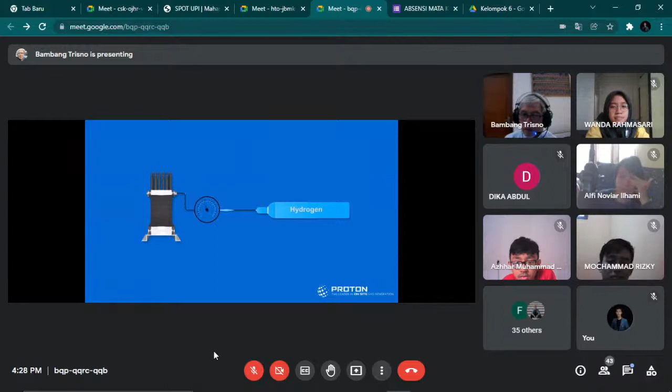PEM electrolyzers have a wide dynamic operating range and couple with renewable resources such as wind, solar, and hydro to store energy in the form of hydrogen for future use. With fast dynamic response times, high pressure, and favorable efficiencies, this sustainable technology is the backbone of energy storage solutions and improves grid stability, renewable intermittency issues, greenhouse gas and pollution reduction targets, and handles projects of varied size with ease. The hydrogen generated by the electrolysis in energy storage solutions can be used for a diverse variety of purposes.

Methanization, for example, uses hydrogen to convert CO2 into methane. Hydrogen can improve this conversion from 55% to 99%, reducing GHG emissions while producing biomethane that can be fed into the natural gas grid or used in a multitude of other areas. Hydrogen can also be used for zero-emission fuel. Fuel cell vehicles rely on this hydrogen for transport from point A to point B, with water being the vehicle's only emission. Hydrogen fueling stations are key to developing a viable and efficient clean transport infrastructure on a global scale.

Alternatively, hydrogen can be used to produce methanol. However, when supplied to industrial applications, hydrogen can be used to support various processes, including ammonia production, refining, and hydrogenation. Additionally, hydrogen can upgrade fossil fuels. When hydrogen is blended with compressed natural gas, nitrous oxide, carbon dioxide, and carbon monoxide emissions are significantly reduced compared to traditional fuels.

Proton On-Site has 20-plus years of experience leveraging innovative PEM technology to support energy storage solutions across the globe. With over 2,500 units installed worldwide, Proton On-Site offers electrolyzers ranging in scale from kilowatt to megawatt capacity that generate 100% emission-free and carbon-free hydrogen to complement renewable resource reliance. Visit our website, www.protononsite.com, to learn more.

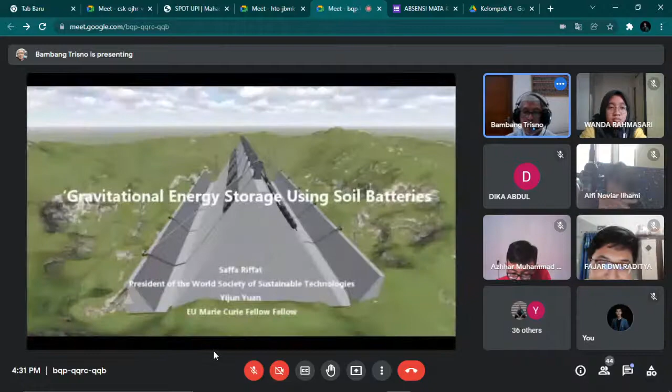Can you imagine our world in 2050? By mid-century there will likely be 9 billion people on the planet, consuming ever more resources and leading ever more technologically complex lives. The world's requirement for electric power is growing rapidly. And according to the International Energy Agency estimates, an additional 250 gigawatts of power will be required annually between now and 2050.

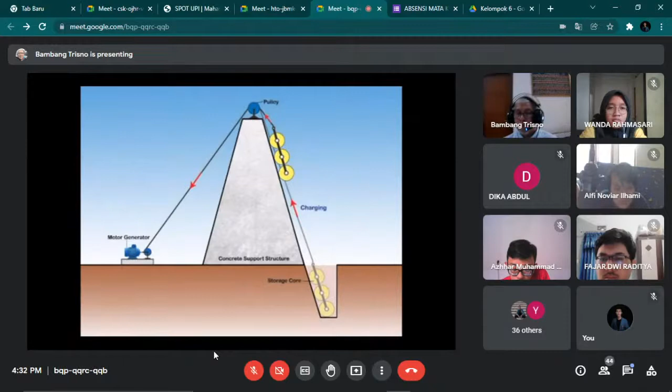Renewable energy technologies including wind, solar, wave and tidal can provide clean energy, but these technologies are intermittent, often producing power when grid utility or users don't require them. In recent years several gravity power technologies have been proposed. A new concept is proposed by University of Nottingham academics Professors Saffa Riffat and Yijun Yuan, who filed a patent application in May 2019, claiming a novel gravity energy storage technology based on drums filled with soil.

The technology uses storage cores that could be shifted between lower and higher points. Pulleys are mounted on the top of central concrete structure. The drums are fitted with axial shafts and bearings and are mounted on a metal frame similar to tarmac rollers. The drums could be then pulled on the sloped central concrete structure, using cables and motor generator. The motor generator is mounted on the ground to provide a good stability and ease of maintenance. When heavy drums move down, they release potential energy to the main grid system.

I've got my dangerous hammer out again, folks, which means yet another slightly lame attempt at demonstrating a physical concept in order to introduce a video. Don't knock it though, it's cheap and it's quick, and it was the heaviest thing I could find in my drawer of many things, so it'll have to do. You might remember I last used it when I looked at liquid air batteries a few months ago.

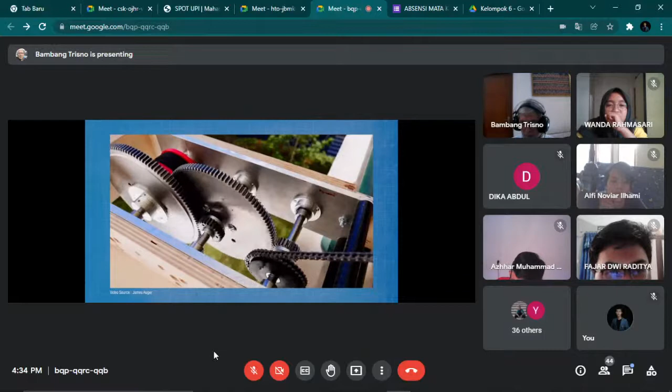And then I saw these young shavers from the Reconstrained Design Group in Madeira, led by an extremely talented British designer called James Auger. They had the distinct advantage of a 4th floor balcony and upped the ante a bit by using a 15-litre water cooler bottle and a smart-ass gearing system, which I hadn't thought of. Anyway, the result is that they were able to very slowly lower the water bottle to generate enough energy to run a turntable playing Folsom Prison Blues by Johnny Cash.

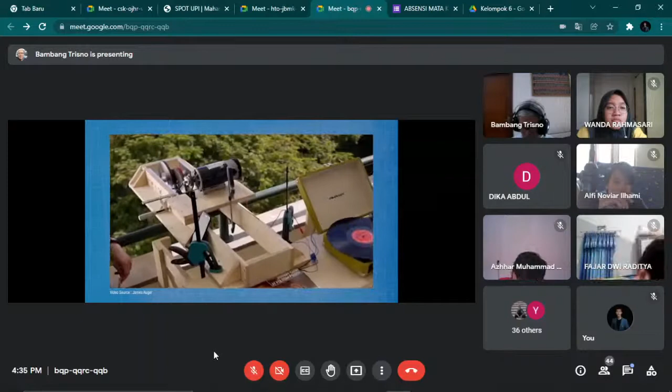I can't let you hear the music, not because I don't enjoy a bit of the old man in black, but because despite being dead, Johnny still insists that people pay him whenever they use his stuff. So I'll leave a link to this video in the description section, and you can listen to his unmistakable dulcet tones there instead.

The point is, the system works, and if you're clever, you can control it extremely precisely, either to deliver energy very quickly, like my design, or in a very controlled and gradual way, like their contraption. And that means if you could scale it up, you might find yourself with yet another solution to grid-scale energy storage. Simple, right?

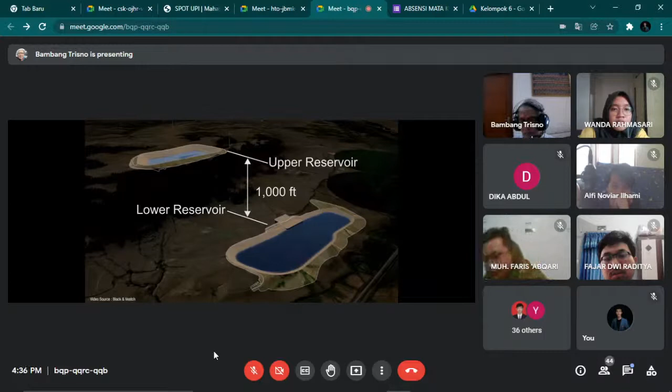Using gravity to provide electrical energy is of course nothing new. We've been doing it with pumped hydro since 1907, when this facility was first started up in Schaffhausen in Switzerland. But not many pumped hydro facilities are being built anymore, mainly because they take years to construct, cost about $1 billion, and quite rightly need all sorts of long-winded and difficult environmental permits. But there are a couple of companies now working on the same concept as James Auger and his mates, literally lowering extremely heavy weights off the top of tall buildings, but on a much, much larger scale.

This 150-metre tall tower system has been developed by a company called Energy Vault, led by co-founder and chief executive Robert Piconi. And it's really very clever indeed. Essentially, you've got 3 big cranes bolted to the top of a 35-storey steel structure surrounded by a stack of huge blocks arranged very precisely into a tight cylinder.

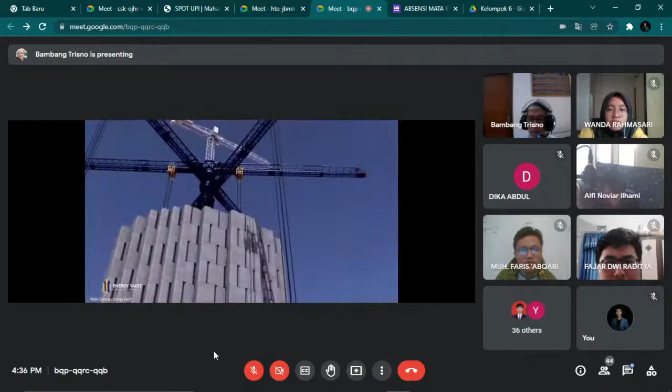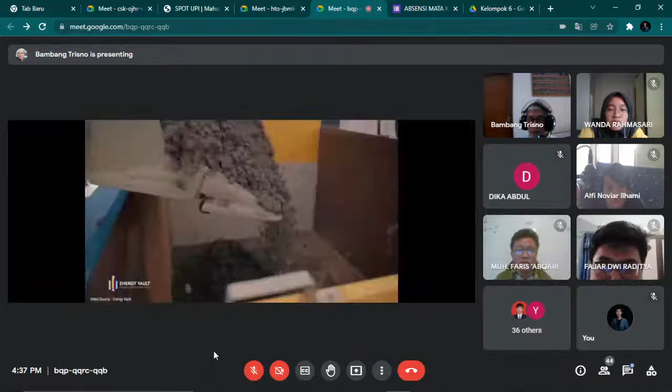They look like concrete, don't they? And if they had actually been cast from brand new concrete, that would have been a very bad idea indeed from an environmental point of view. But Energy Vault have partnered with Mexican materials company Cemex to develop a composite material made up of waste products. There is some concrete in the mix, but it all comes from demolition debris. And that's added to coal ash, industrial slag, and even some of the soil from local building sites, all of which would most likely otherwise have just been dumped in landfill.

There's 6,000 of these composite bricks in the structure, and each one weighs 35 tons. A system of pulleys and motors, all controlled by mind-bogglingly sophisticated software, can move several blocks at a time, shifting them from their predetermined positions in the tall, tight stack to another very precisely controlled position lower down, creating an outer cylinder. As the blocks are lowered, the pulleys cause a rotation that generates electricity. Then when the structure needs to be recharged, renewable energy from surrounding wind turbines powers the winches to pull the blocks back up into their original location.

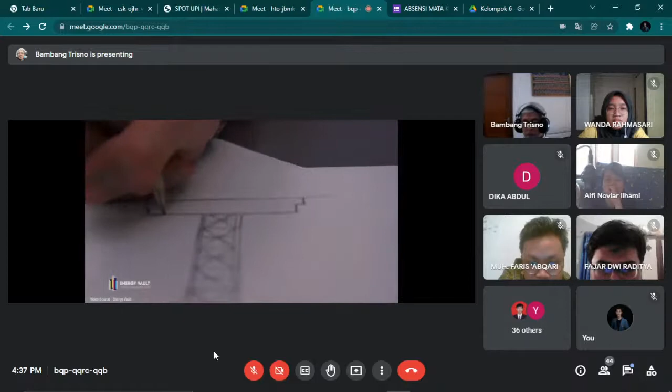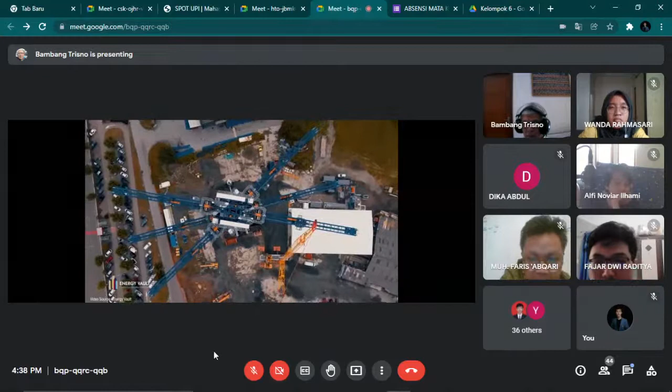The company developed their system in Switzerland and built their first full-scale commercial demonstration unit, or CDU, on the outskirts of a town called Arbedo-Castione in 2020. They claim a standard configuration can provide 35 megawatt hours of power to the grid. It's pretty quick too. Piconi reckons the system can go from 0 to 4 megawatts in just 2.9 seconds and provide instant response within milliseconds. And that means it rivals lithium-ion batteries as a frequency response grid balancer.

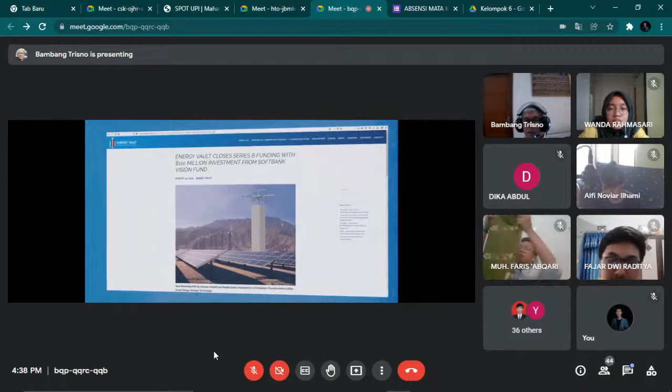But it can also be used as a black start service, which in other words means bringing a grid system back online in the event of a blackout. Or it can be run more slowly to provide up to 10 hours of continuous baseload discharge. Energy Vault are backed by some pretty hefty investment too, in the form of $110 million from SoftBank, a Japanese investment bank specialising in bringing sustainable technologies like this to market.

SoftBank already invest in large-scale renewable energy projects all over the world, so their partnership with Energy Vault should be a kind of symbiotic relationship, with the bank opening new doors for Energy Vault and Energy Vault's system facilitating even more competitive cost structures for SoftBank's investments. Piconi says they've got their levelized cost per megawatt hour down to somewhere between $30 and $40, which, if combined with renewable energy sources, can potentially undercut existing gas-fired power plants.

Hot on their heels, but not quite so far ahead on development, is this Edinburgh-based startup called Gravitricity, founded by a guy called Peter Fraenkel. Fraenkel is perhaps best known for inventing the world's first full-scale tidal energy turbine, which was bought by the German energy and manufacturing giant Siemens. Gravitricity are working on the same basic principles of physics as Energy Vault, but their unique selling point is that they intend to utilise disused mine shafts as underground void spaces into which they can lower their electricity generating weights.

You might think that's a bit of a serious limitation, but actually there's a surprising number of these shafts strewn all over the planet. A full-size version of their system will be able to move weights of between 500 and 5,000 tonnes up and down within the shaft, using multiple cables to distribute the loads evenly. They claim a 50-year design life with no cycle limit or degradation, something that represents a significant advantage over lithium-ion batteries. Just like Energy Vault, they reckon they can hit a 0 to full power response time of less than 1 second with a system efficiency of somewhere between 80 and 90%.

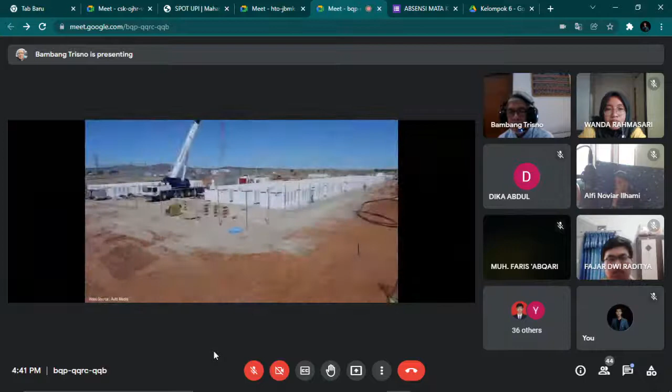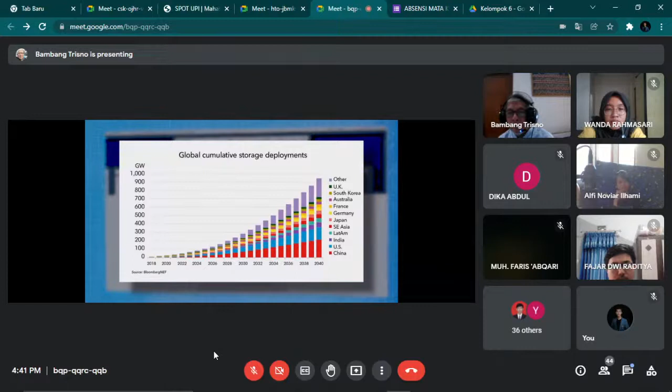Lithium-ion batteries currently dominate the grid-scale energy storage market, a sector that Bloomberg New Energy Finance projects to grow from 9 gigawatts in 2018 to more than 1 terawatt in 2040. But there's a growing number of alternatives, including these gravity systems, that are now challenging lithium-ion supremacy. We've already looked at liquid air batteries and redox flow batteries. Another option is zinc air, being developed by a Canadian firm called Zinc8, and then there's liquid metal batteries being developed by Ambri, both of which we'll take a closer look at in future programs.

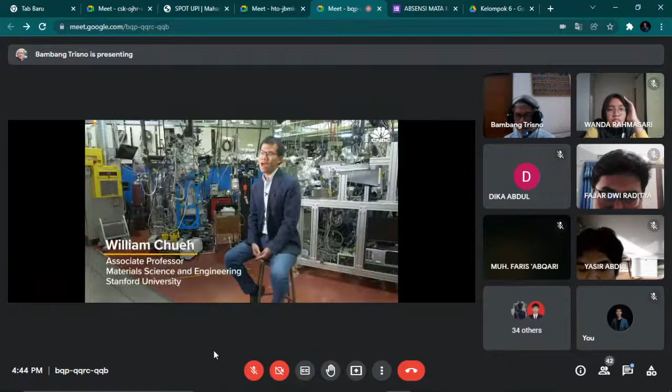You see them in products like Tesla's home battery, the Powerwall, and utility-scale system, the PowerPack. But though lithium-ion is dropping in price, experts say it will remain too expensive for most grid-scale applications. To get to battery for the electrical grid, we need to look at a further cost reduction of 10 to 20x. Right now, lithium-ion batteries just can't store more than 4 hours worth of energy at a price point that would make sense. Plus, they pose a fire risk, and their ability to hold a charge fades over time.

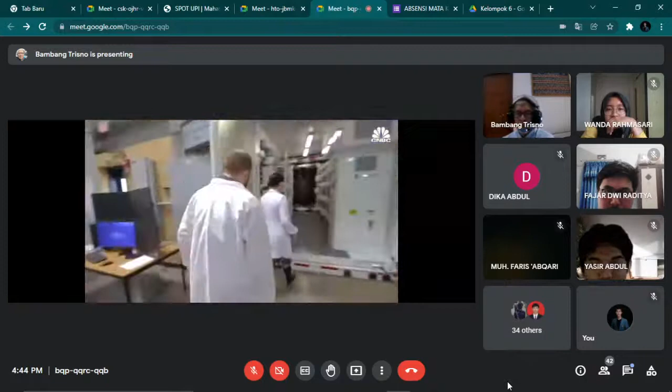To address this, there's a cadre of entrepreneurs experimenting with a variety of different solutions. Now we're seeing flow batteries, which are liquid batteries, and other forms of storage that are not chemical or battery-based. And each has serious potential. We looked at materials on the periodic table that were actually going to be cost competitive from day one. Primus Power's flow battery is a workhorse. Thermal energy storage has a pretty unique opportunity to be extremely low cost. Our solution will last 30 plus years without any degradation in that performance.

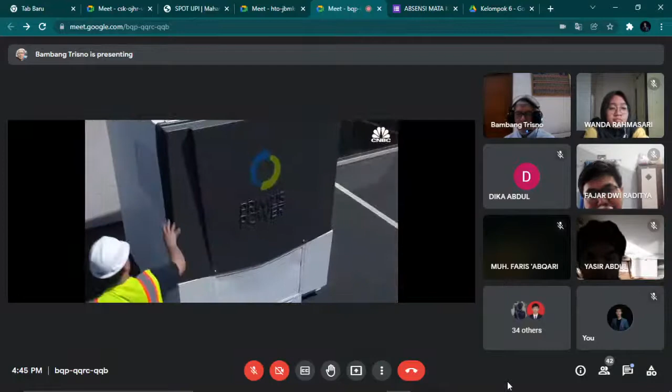Which technologies prevail remains to be seen, but one thing is clear: for renewables to truly compete with fossil fuels, we need to figure out a better way to store energy.

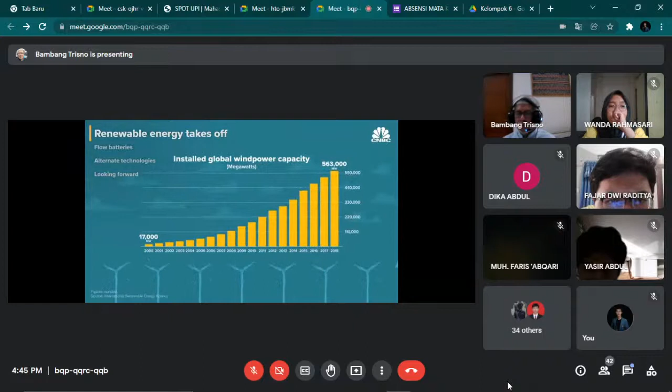From 2000 to 2018, installed wind power grew from 17,000 megawatts to over 563,000 megawatts, and solar power grew from a mere 1,250 megawatts to 485,000 megawatts. And it's not stopping there. Renewables are expected to grow an additional 50% over the next 5 years.

We know today that solar PV and wind are the least expensive way to generate electricity. In particular, the price of solar photovoltaics has plummeted far faster than all forecasts predicted, after China flooded the market with cheap panels in the late 2000s. All the Wall Street analysts did not believe that solar was going to ever stand on its own without subsidies.

Well, a few years later, even the most conservative analysts started realizing that actually solar was going to become economic in most parts of the world pretty quickly.

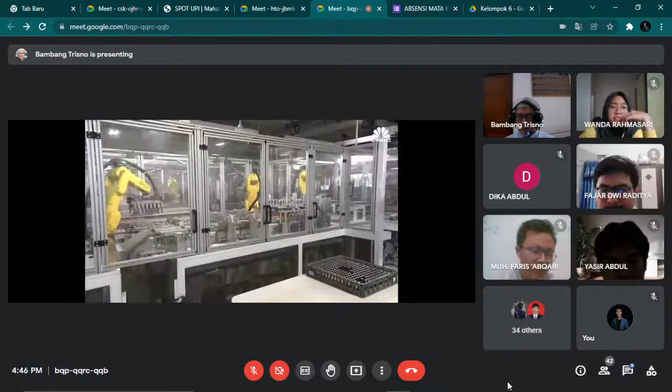And as solar's gotten cheaper, so too have lithium-ion batteries, the technology that powers electric vehicles, our cell phones, and laptops. Thanks to improved manufacturing techniques and economies of scale, costs have fallen 85% since 2010.

Now, wind or solar plus battery storage is oftentimes more economical than peaker plants, that is, power plants that only fire when demand is high.

Tesla, for example, built the world's largest lithium-ion battery in Australia, pairing it with a wind farm to deliver electricity during peak hours. But this doesn't mean lithium-ion is necessarily economical for other grid applications.

We don't really see the cost structure coming down to the point where it can serve those tens to hundreds of hours applications. Basically, the market is ripe for competition.

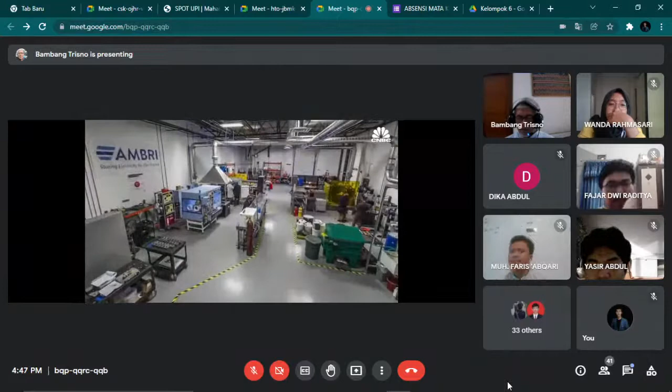There are dozens of chemistries being looked at today, and hundreds of companies working on scaling up and manufacturing new battery technology.

Lithium-ion has done remarkable things for technology, but let's go to something far better.

One of the main alternatives being explored is a flow battery. Unlike lithium-ion, flow batteries store liquid electrolyte in external tanks, meaning the energy from the electrolyte and the actual source of power generation are decoupled. With lithium-ion tech, the electrolyte is stored within the battery itself.

Electrolyte chemistries vary, but across the board, these aqueous systems don't pose a fire risk, and most don't face the same issues with capacity fade. Once they scale up their manufacturing, these companies say they'll be price competitive with lithium-ion.

Hayward, California-based Primus Power has been working in the space since 2009 and uses a zinc bromide chemistry. So far, it's raised over $100 million in funding, including a number of government grants from agencies like the Department of Energy and the California Energy Commission.

Primus's modular Energy Pod provides 25 kilowatts of power, enough to power 5 to 7 homes for 5 hours during times of peak energy demand, and for 12 to 15 hours during off-peak hours. Most systems use multiple energy pods, though, to further boost capacity.

The company says what sets it apart is its simplified system. So instead of 2 tanks, which every other flow battery has, Primus only has 1.

We are able to separate the electrochemical species by taking advantage of the density differences between the zinc bromine and the bromine itself and the more aqueous portion of that electrolyte.

To date, Primus has shipped 25 of its battery systems to customers across the US and Asia, including a San Diego military base, Microsoft, and a Chinese wind turbine manufacturer.

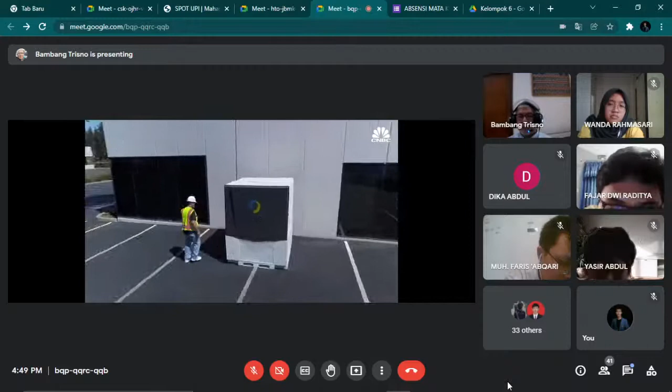It expects to ship an additional 500 systems over the next 2 years. Future customers are either independent power producers doing solar plus storage at the utility scale, or larger commercial enterprises.

Also operating in this space is ESS Inc., an Oregon-based manufacturer of iron flow batteries, founded in 2011. Its systems are larger than Primus Power's.

They're basically batteries in a shipping container, and they can provide anywhere from 100 kilowatts of power for 4 hours to 33 kilowatts for 12 hours, using an electrolyte made entirely of iron, salt, and water.

When we came into this market, we wanted to come into it with a technology that was going to be very environmentally friendly. It was going to be very low cost. It didn't require a lot of volume on the production line to drive down costs.

ESS is backed by some major players like SoftBank Energy, the Bill Gates-led investor fund Breakthrough Energy Ventures, and insurance company Munich Re. Having an insurance policy is a big deal, since it will make risk-averse utility companies much more likely to partner with it.

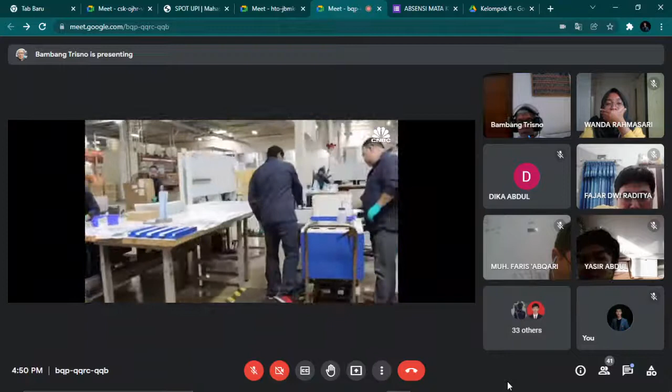So far, ESS has 6 of its systems, called Energy Warehouses, operating in the field, and plans to install 20 more this year. It's also in the process of developing its Energy Center, which is aimed at utility-scale applications in the 100 megawatt plus range.

That would be 1,000 times more power than a single energy warehouse.

We're planning to be at 250 megawatt hours of production capacity by the end of this year, which is probably a little over 10 times the capacity we had last year.

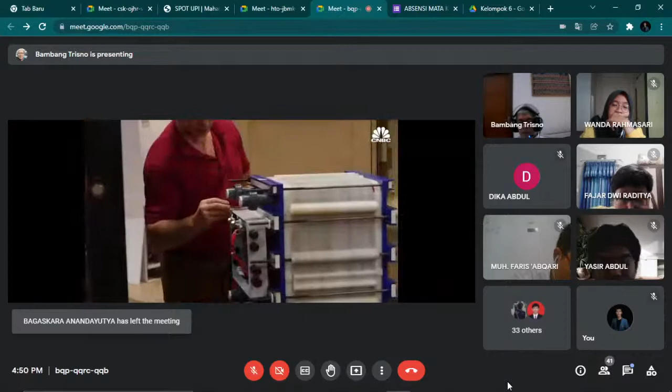And then eventually getting to a gigawatt hour of production capacity in the next couple years. So far, key customers include Pacto Energia, a private Brazilian energy supplier, and UC San Diego.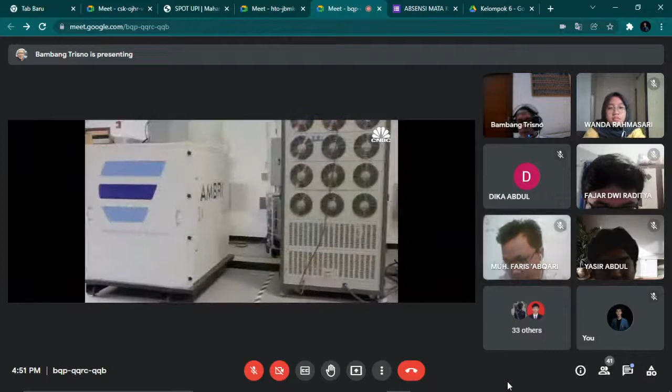But for all their potential, flow battery companies like Primus and ESS Inc. still aren't really designed to store energy for days or weeks on end. Many of those flow battery technologies still suffer from the same fundamental materials cost challenges that make them incapable of getting to tens or hundreds of hours of energy storage capacity. Other non-lithium-ion endeavors, such as the MIT spin-off Ambri, face the same problem with longer duration storage. Form Energy, a battery company with an undisclosed chemistry, is targeting the weeks or months-long storage market, but commercialization remains far off. So other companies are taking different approaches entirely.

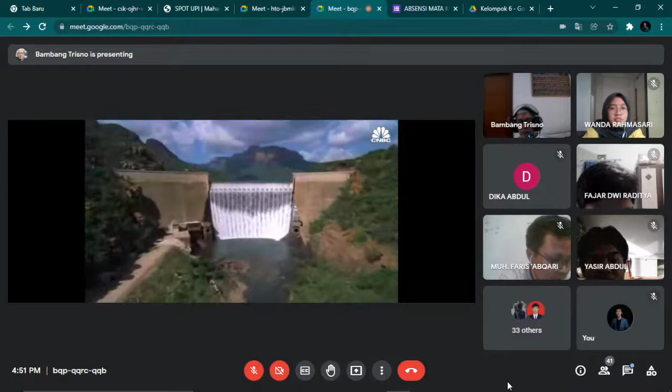Currently, about 96% of the world's energy storage comes from one technology: pumped hydro. This system is pretty straightforward. When there's excess energy on the grid, it's used to pump water uphill to a high elevation reservoir. Then, when there's energy demand, the water is released, driving a turbine as it flows into a reservoir below. But this requires a lot of land, disrupts the environment, and can only function in very specific geographies.

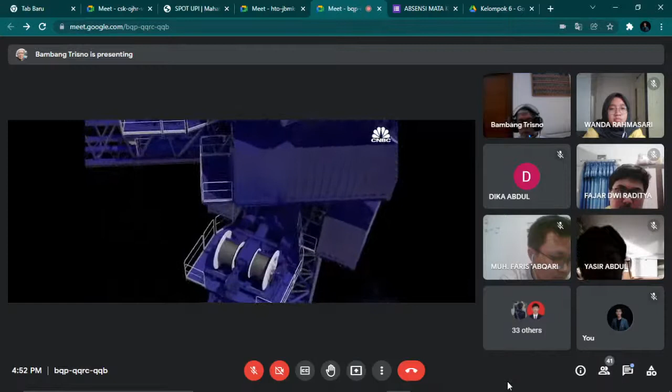Energy Vault, a gravity-based storage company founded in 2017, was inspired by the concept, but thinks it can offer more. And so we wanted to look at solving the storage problem with something much more environmental, much more low cost, much more scalable, and something that could be brought to market very quickly.

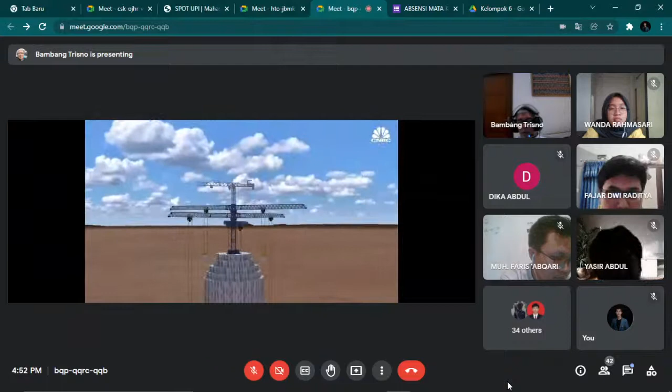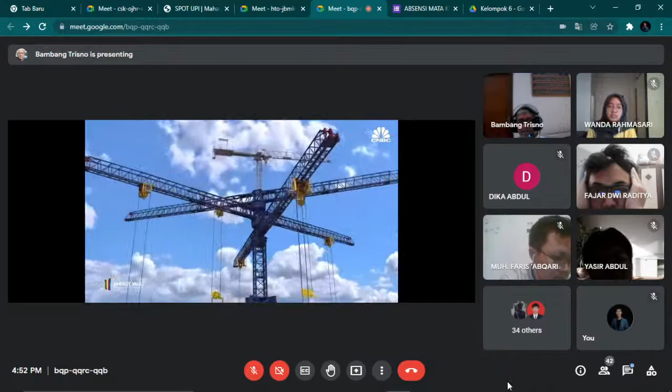Instead of moving water, Energy Vault uses cranes and wires to move 35-ton bricks up and down, depending on energy needs, in a process that's automated with machine vision software. We have a six-arm tower crane that's utilizing excess solar or wind to drive motors and generators that lift and stack the bricks in a very specific sequence. Then when the power is needed from the grid, that same system will lower the bricks and discharge the electricity.

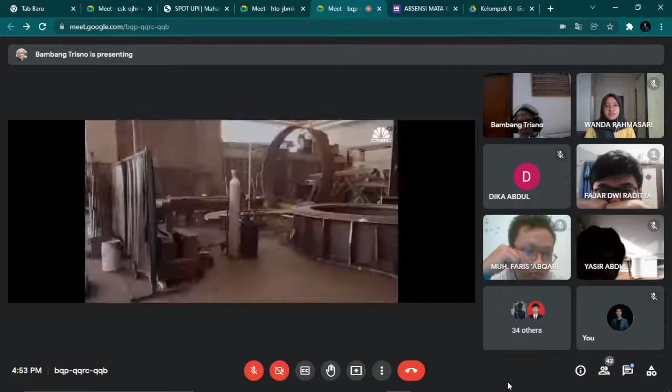This system is sized for utility scale operation. The company says a standard installation could include 20 towers, providing a total of 350 megawatt hours of storage capacity, enough to power around 40,000 homes for 24 hours. Some of our customers are looking at very large deployments of multiple systems so that they'll have that power on demand for weeks and months and whenever it's going to be required. The company recently received $110 million in funding from SoftBank Vision Fund, and it's building out a test facility in Switzerland, as well as a plant for India's Tata Power Company.

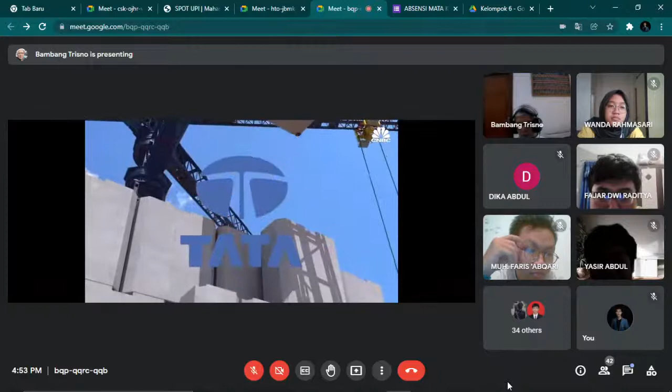But some say the sheer size of the operation means it just can't be a replacement for chemical batteries. Sounds very simple. However, the energy density on those systems are very low. And so that's where we believe chemical-based storage still has an advantage in terms of a footprint. You can't install a gravity-based system in the city, but you'd have to install it outside in the remote areas.

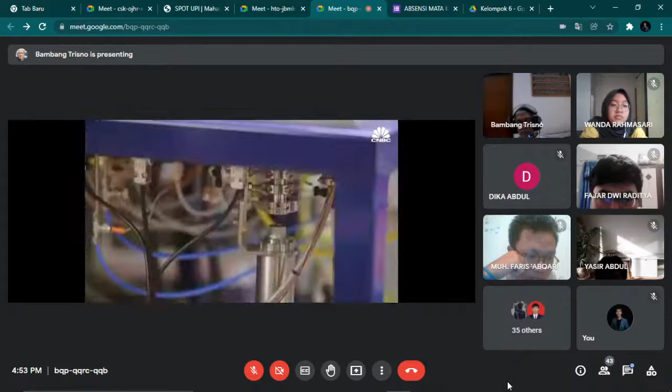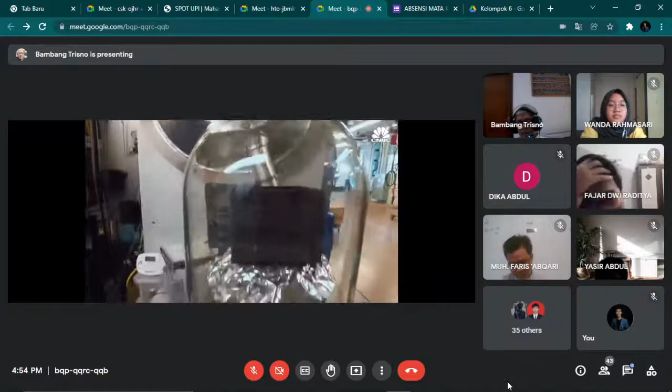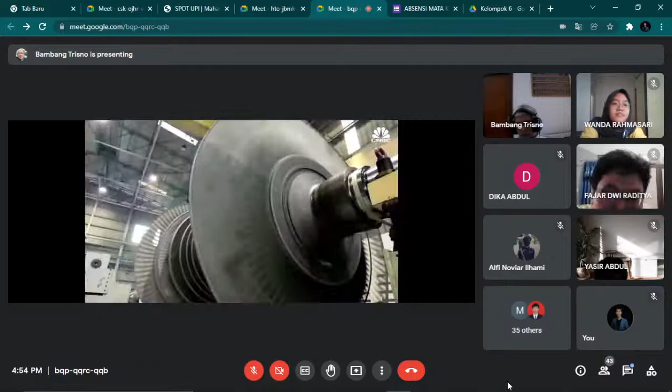Then there's thermal storage. It's still an emerging technology in this space, but it has the potential to store energy for longer than flow batteries, with a smaller footprint than gravity-based systems. Berkeley, California-based Antora Energy, founded in 2017, is taking on this challenge. Basically, when there's excess electricity on the grid, that's used to heat up Antora's cheap carbon blocks, which are insulated inside a container. When needed, that heat is then converted back into electricity using a heat engine. Typically, this would be a steam or gas turbine, but Briggs says this tech is just too expensive and has prevented thermal storage solutions from working out in the past.

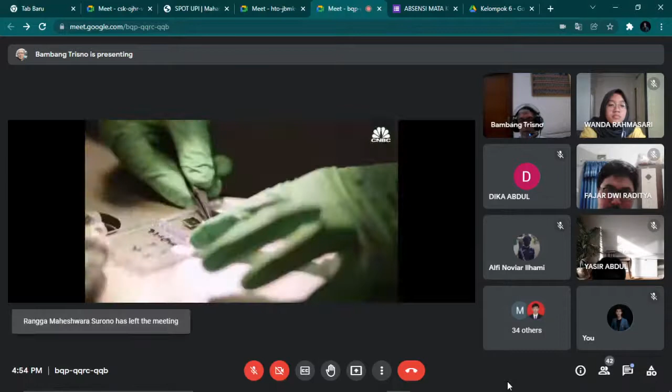So Antora has developed a novel type of heat engine called a thermophotovoltaic heat engine, or TPV for short, which is basically just a solar cell, but instead of capturing sunlight and converting that to electricity, this solar cell captures light radiated from the hot storage medium and converts that to electricity. So it's electricity in, electricity out, and it's stored in ultra-cheap raw materials as heat in the meantime.

Recently, Antora received funding from a joint venture between the Department of Energy and Shell, who are excited by the company's potential to provide days or weeks-long storage. We think that solves a need that is currently and will continue to be unmet by lithium-ion batteries, and that will sort of enable the next wave of integration of renewables on the grid.

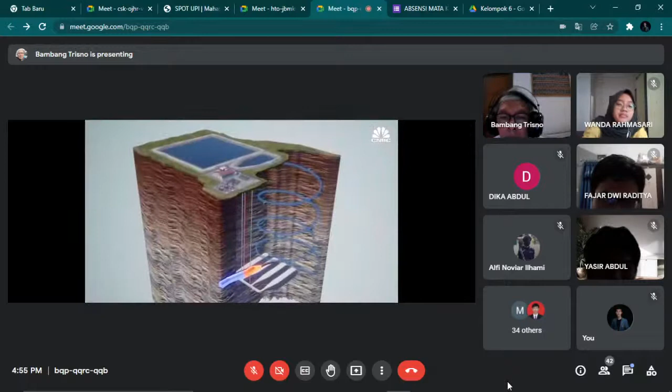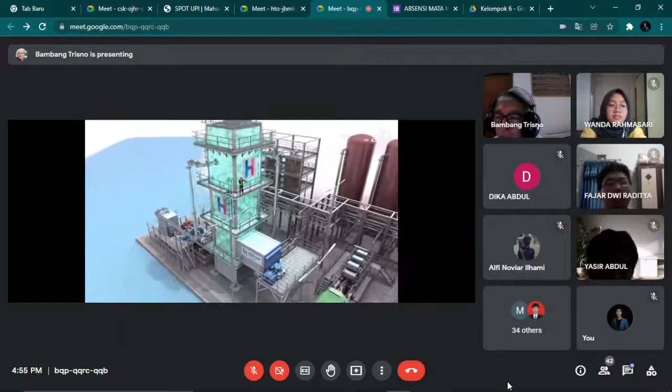It's still early days for Antora and Energy Vault, though, and there's definitely other creative solutions in the mix. For example, Toronto-based Hydrostor is converting surplus electricity into compressed air, and UK and US-based Highview Power is pursuing cryogenic storage. That is, using excess energy to cool down air to the point where it liquefies. These ideas may seem far out, but investment is pouring in, and projects are being piloted around the world.

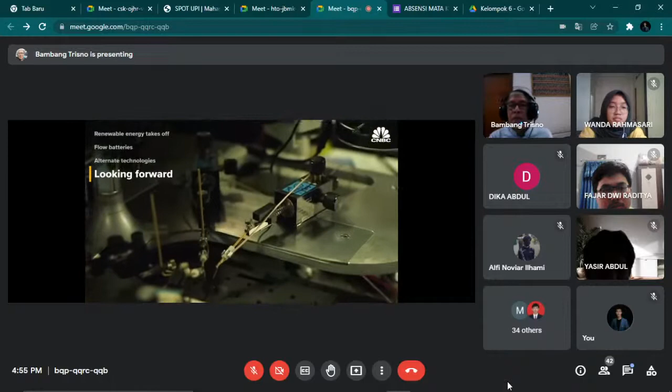While these companies are all vying to be the cheapest, safest, and longest lasting, many also recognize that this is a market with many niches, and therefore the potential for multiple winners. In the residential and commercial areas, you're going to have a certain type of technology. A lot of it will probably be battery-based. I think as you get to utility scale and grid scale, you're going to see some batteries, you're going to see other types of compressed air and liquid air solutions, and then you're going to see some of the gravity solutions that could be scaled.

Overall, the energy storage market is predicted to attract $620 billion in investments by 2040. But as always, it's going to be tough to get even the most promising ideas to market. No matter if the raw materials were dirt cheap, the initial cost of a first system is essentially astronomical. Of course, government policies and incentives could play a major role as well. There is a production tax credit on wind. There's an investment tax credit on solar.

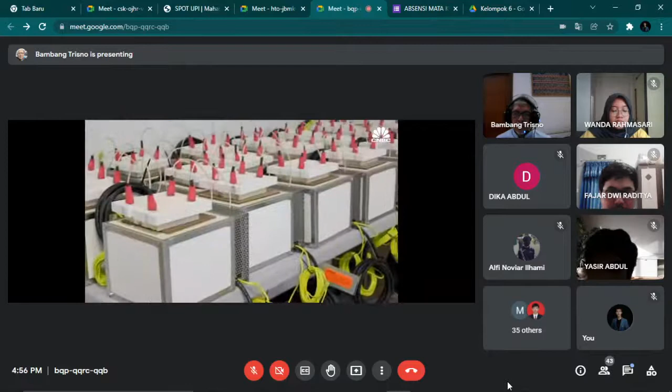We, in the battery community, would like to see an ITC for batteries in the same way that it is in existence for solar. Implementing a storage mandate, as California has done, is another policy that many are advocating. When we get to roughly 20% of our peak demand available in storage, we will be able to run a renewable-only system because the mix of solar and wind, geothermal, biomass, all backed up with storage, will be enough to carry us through even some of these potentially long lulls.

With the right mix of incentives and ingenuity, we're hopefully headed towards a future with a plethora of storage technologies. The future is not going to be a mirror of the past. We've got to do something that's radically different from everything that's been done up until now. I'm really excited about that.

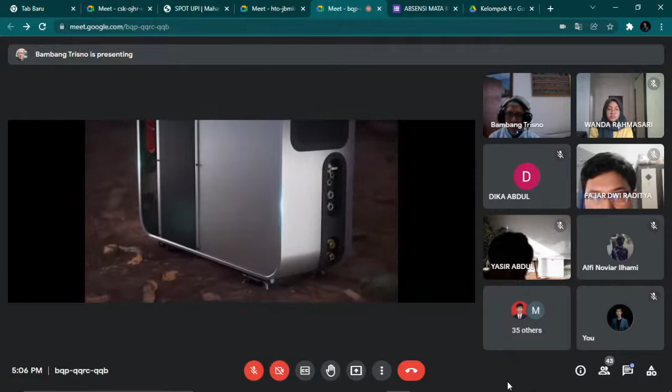I have to give them credit where credit is due because the Lavo hydrogen energy storage system design looks terrific compared to many of the other products out there.